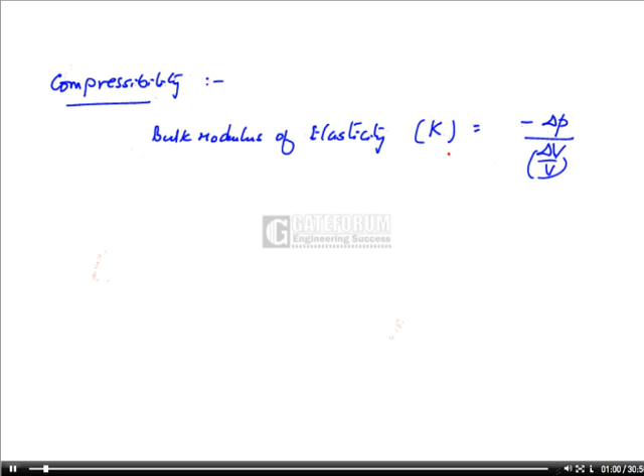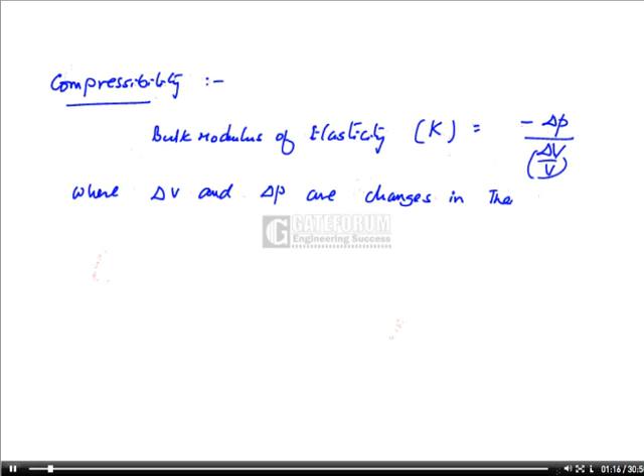How do we define bulk modulus? Bulk modulus of elasticity, K, we define as volumetric stress by volumetric strain, where delta V and delta P are changes in the volume and the pressure respectively, and V is the initial volume. Negative sign only means that as the volume decreases, the pressure will be increasing.

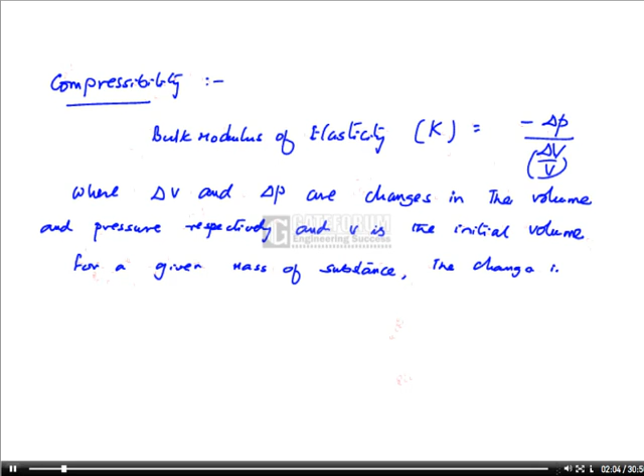For a given mass of substance, the change in volume and density rho satisfies the relation delta V by V, change in volume by initial volume, is minus delta rho by rho. Therefore, bulk modulus K can also be defined as rho into dP by d rho, where P is the pressure and rho is the density.

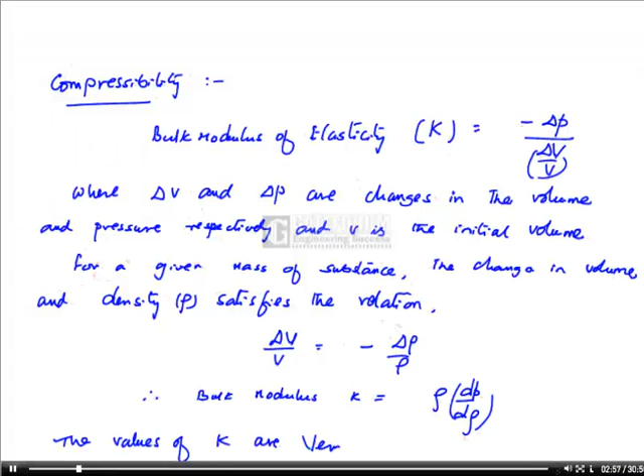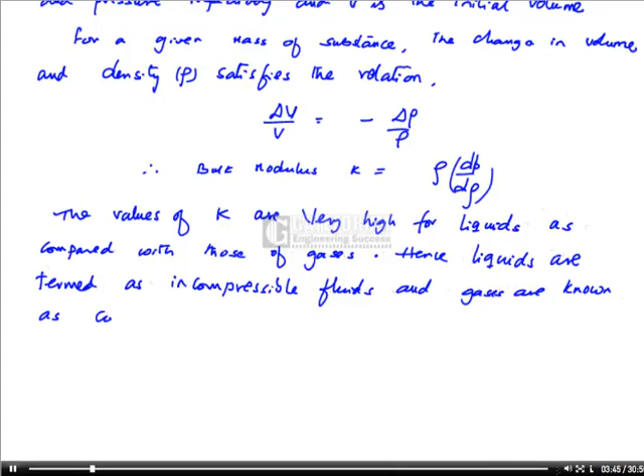The values of K are very high for liquids as compared with those of gases. Hence liquids are termed as incompressible fluids, and gases are known as compressible fluids. This is a very important distinction between the gases and liquids.

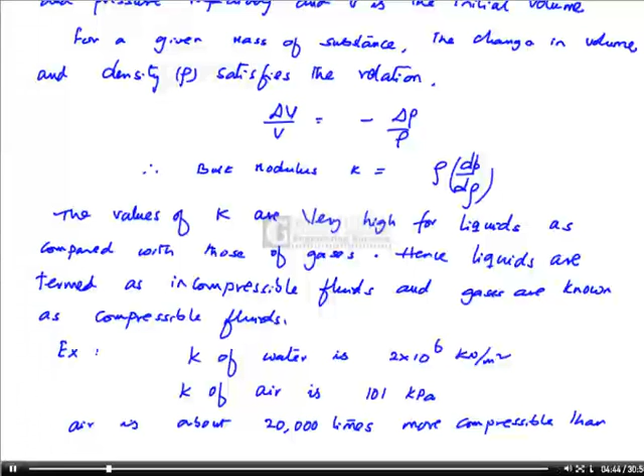For example, K of water is 2 into 10 power 6 kilonewton per meter square, whereas K of air is 101 kilopascal at atmospheric pressure. So look at the difference between the K values of water and air. So I can say air is about 20,000 times more compressible than water. Therefore, water can definitely be treated as incompressible fluid.

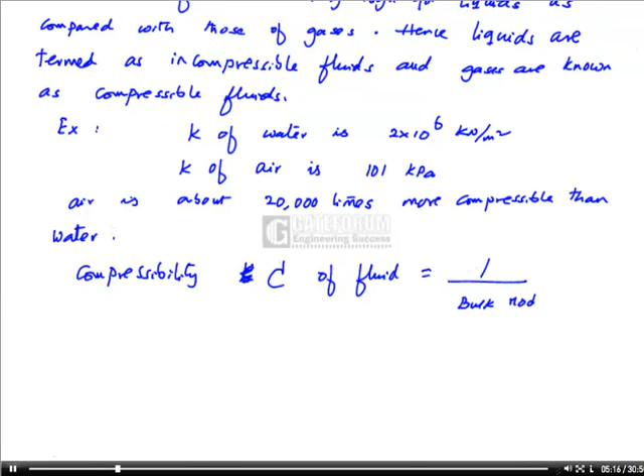Now, compressibility C. Compressibility C of fluid is 1 by bulk modulus of elasticity. Therefore, C is 1 by K. So I can define C as 1 by rho d rho by dP, or minus 1 by V delta V by delta P.

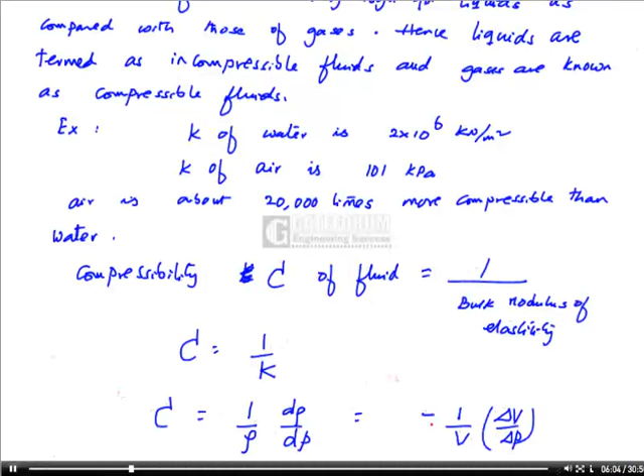For any gaseous substance, usually a change in pressure is associated with a change in volume and change in temperature. For gases, particularly for ideal gases, we can write the thermodynamic equation of state as P is rho R T. The change in pressure is associated with change in density as well as change in temperature, where R is the gas constant. We already know this is a thermodynamic relation. Thermodynamically, PV is equal to MRT. This is the same equation as PV is equal to MRT, or ideal gas equation or perfect gas equation.

So I want to highlight here that for liquids, density is practically a constant, whereas for gases, density is a function of pressure. Therefore, liquids are termed as incompressible fluids. So from now onwards, whenever densities are treated as constant, that means the fluid is treated as incompressible fluid. If density is a function of pressure, the fluid should be compressible. Usually it is gases. All the liquids are incompressible fluids.

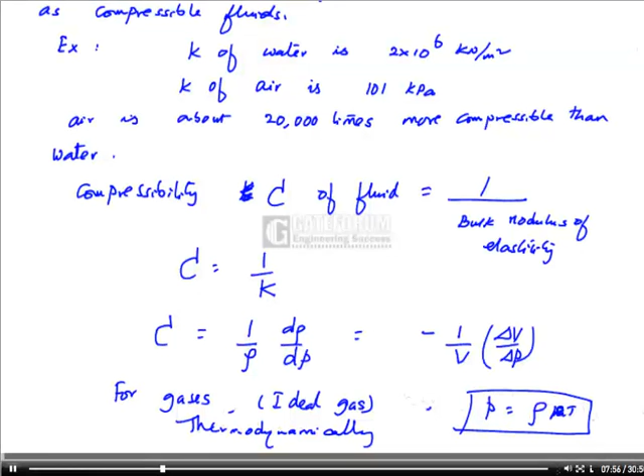But there is one important note here: under very small changes of density, that is if the density changes are less than 5%, even gas flows can be treated as incompressible flows, because such density changes less than 5% can always be neglected, and practically that gas flow can be treated as incompressible flow if the density changes are less than 5%.

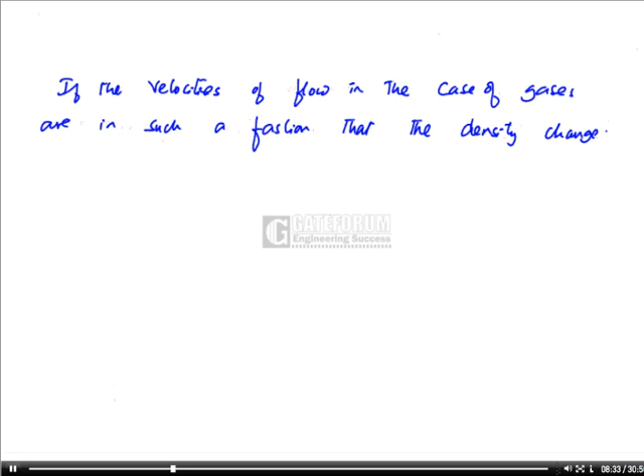So I can say that if the velocities of flow in the case of gases are such that the density changes of gases are less than 5%, then such flows can be treated as incompressible flows.

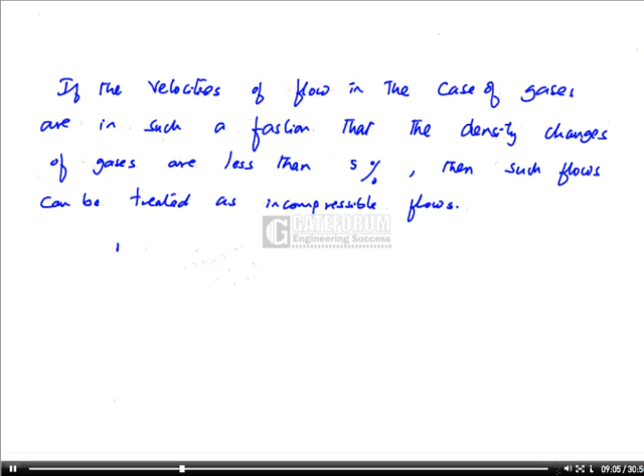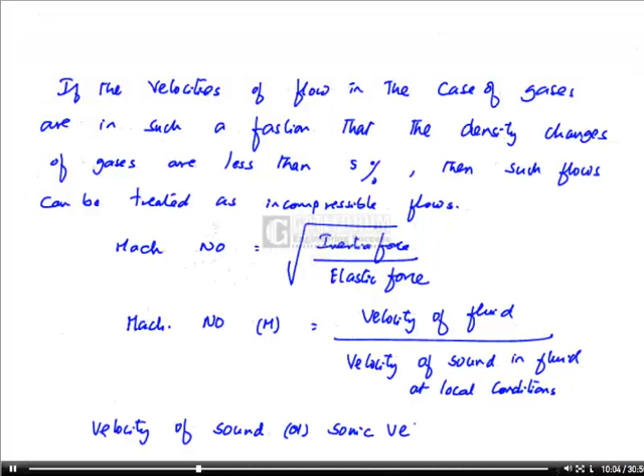So now here I use a very important number known as Mach number for distinguishing between compressibility and incompressibility of a fluid. Mach number is defined as square root of inertia force divided by elastic force. Mach number M is also defined as velocity of fluid divided by velocity of sound in fluid at local conditions. The velocity of sound or sonic velocity A is defined as square root of bulk modulus divided by density of the fluid.

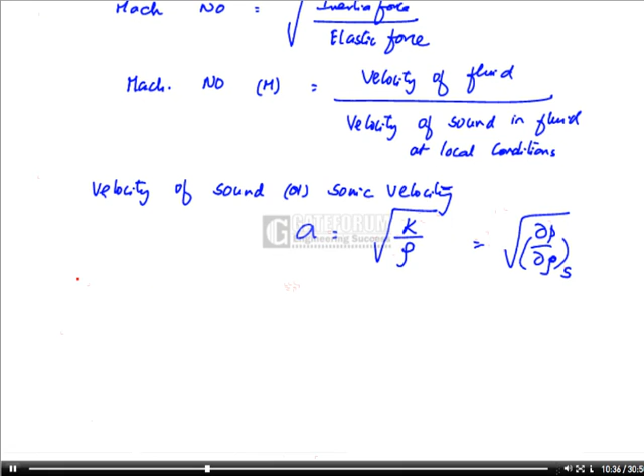It can also be written as square root of dou P by dou rho at isoentropy conditions. If Mach number is greater than 1, it implies flow is supersonic. If Mach number is less than 1, it means flow is subsonic flow. If M is equal to 1, it implies flow is sonic flow.

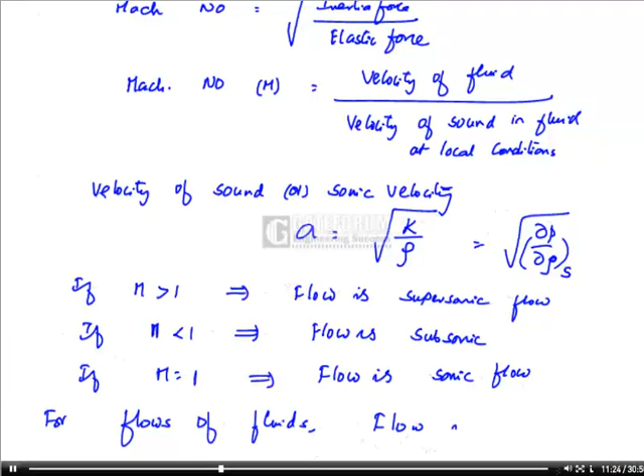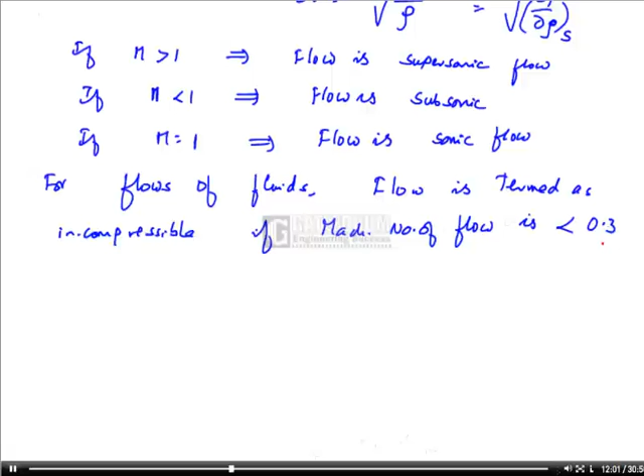So for flows of fluids, flow is termed as incompressible if Mach number of flow is less than 0.3. That is, roughly the velocity of flow is about 110 meters per second. For example, if the air flow is around 110 meters per second, the flows of air can be treated as incompressible flow. Example I can give.

The velocity of flow of air up to 110 meters per second under local standard conditions, then flow is treated as incompressible flow because density changes are not appreciable. The density changes are maximum 5% only. So this is very important, distinguishing between compressibility and incompressibility of a fluid.

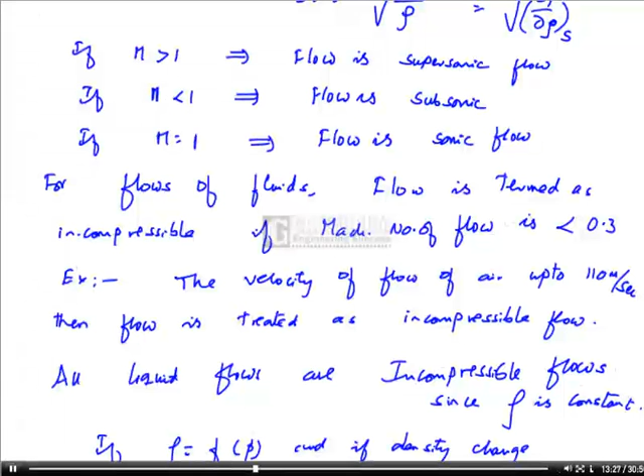All liquid flows are incompressible flows, since density is constant. If rho is a function of pressure and if the density changes are appreciable, and if density changes are more than 5%, it implies flow is compressible flow. Analysis of compressible flow is slightly advanced fluid mechanics.

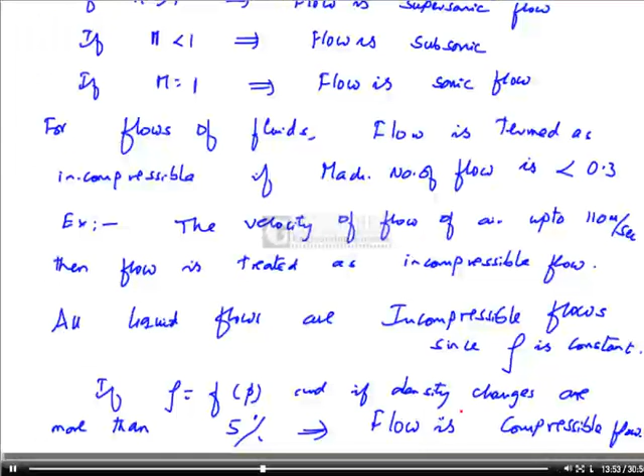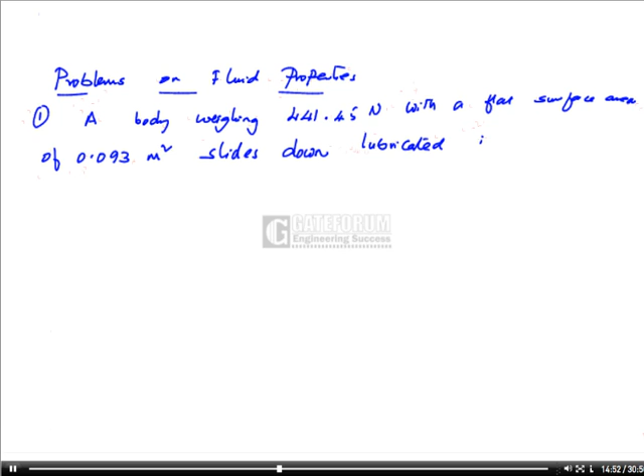Now I shall solve problems on fluid properties. First problem. The problem is given like this. A body weighing 441.45 newtons with a flat surface area of 0.093 meter square slides down a lubricated inclined plane making a 30-degree angle with the horizontal.

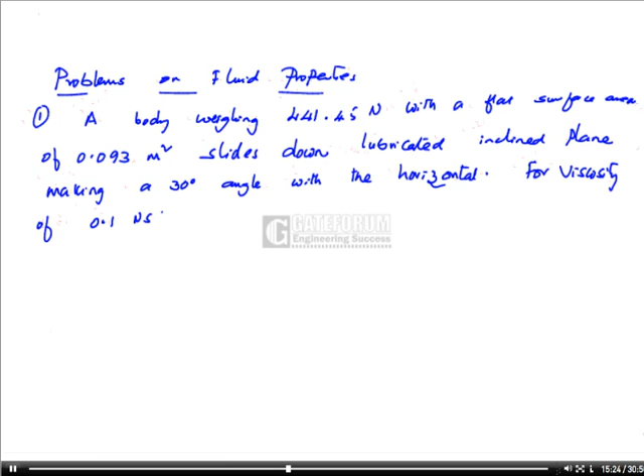For viscosity of 0.1 Newton second per meter square and body speed of 3 meters per second, determine lubrication film thickness. The solution to this problem is given like this.

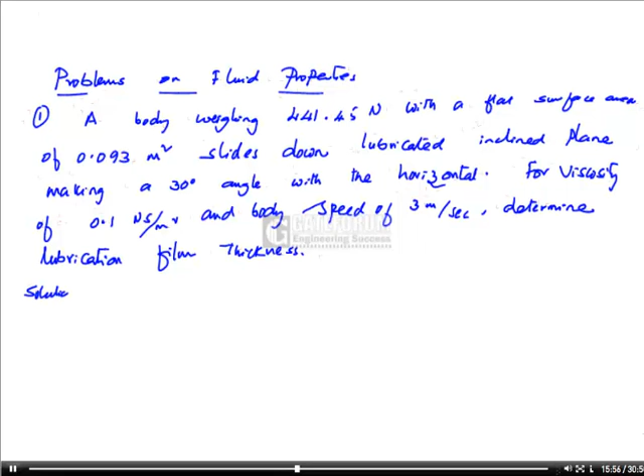It's an inclined plane over which the flat plate having a contact area of 0.093 meter square is sliding over a lubricant film of thickness Y. Thickness of the lubricant is Y. The plate is sliding down with a velocity of 3 meters per second. Since the gap between plate and inclined plane which is filled with the lubricant is very small, that is Y is very small,

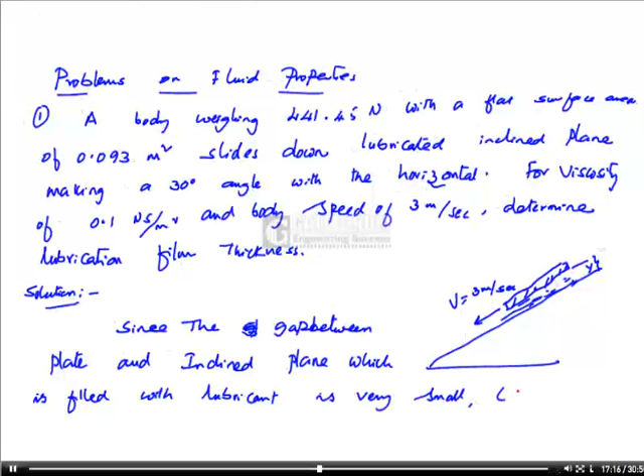dV by dy can be taken as V by Y, that is velocity variation with respect to Y is treated as linear. That is, if this is a plate, if this is inclined plane of 30 degrees, the velocity variation can be treated like this. If this is the plate, the velocity variation can be treated as linear.

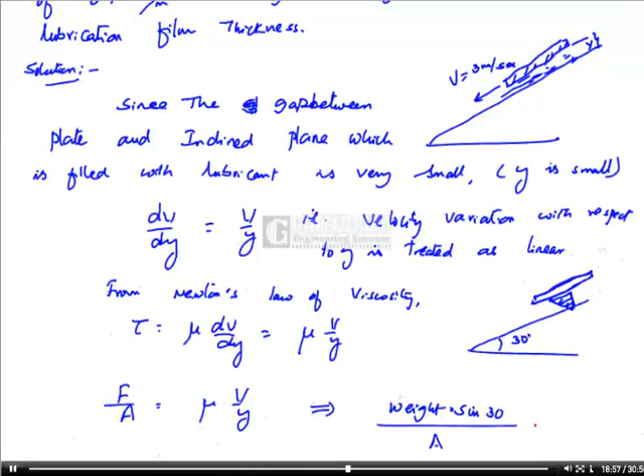Therefore, from Newton's law of viscosity, tau is equal to mu into dV by dy, that is mu into V by Y. What is tau? F by A is equal to mu into V by Y. What is the force that is acting on the plate going downwards? That is weight into sin 30 divided by area is equal to mu into V by Y. What is weight? 441.45 into sin 30. What is the area of contact?

The weight component that is acting is W sin 30, which is opposed with the viscous resistance. This is viscous resistance, viscous force. Viscous force is a non-conservative force. So the downward weight component is exactly balanced upwards with the viscous force or viscous resistance offered by lubricant film thickness. That is the reason why net force along the plane acting on the plate is 0. The body is sliding down with constant velocity. So the weight component is nothing but the viscous force upwards acting on the plate.

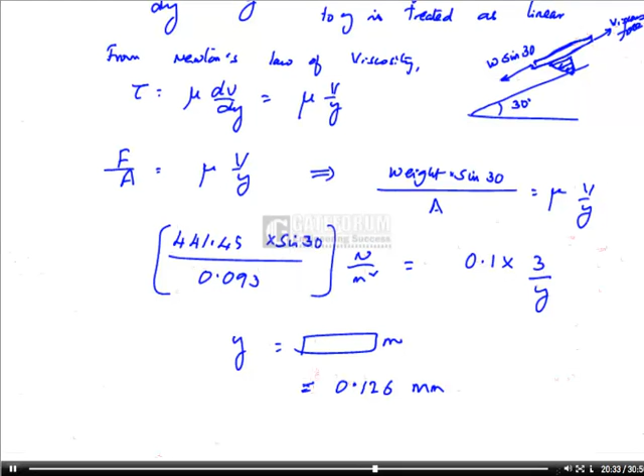F divided by area is 0.093 meter square. This is given by Newton by meter square is equal to mu, given as 0.1, into the velocity, sliding at 3 meters per second. Y is unknown. Therefore, Y is obtained in meters. The answer for Y should be obtained as 0.126 millimeters. So as we have assumed the gap is very small, the assumption is right. So for such small, narrow gaps, the velocity profile can be assumed as linear, and hence du by dy can be treated as v by y. The velocity gradient can be treated as v by y. Hence the problem.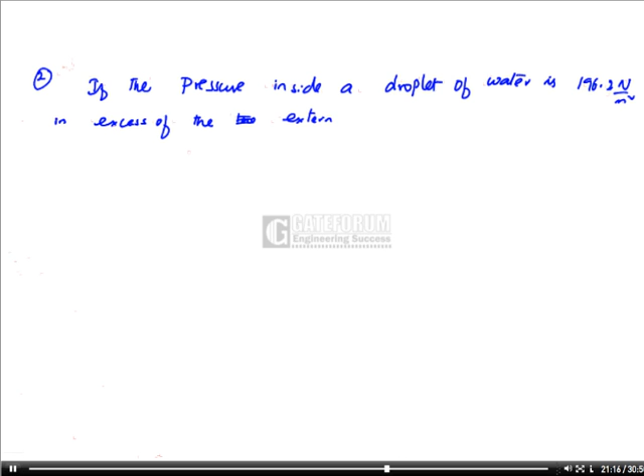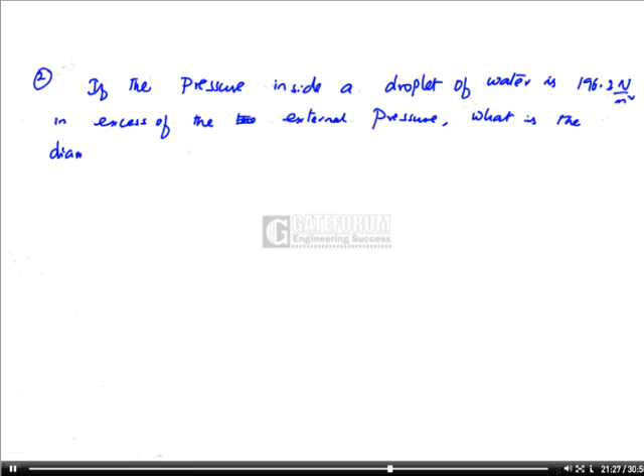Problem number 2. It is on the surface tension. If the pressure inside a droplet of water is 196.2 Newton per meter square in excess of the external pressure, what is the diameter of droplet?

Given that sigma of water in contact with air at 20 degrees centigrade is 0.07358 Newton per meter. The solution to this problem is given as: this is the water droplet having the radius r.

The pressure P gauge inside the water droplet, that is, pressure in excess of the droplet above atmosphere; outside is atmosphere. The P gauge, the pressure inside the droplet in excess of the outside atmospheric pressure, is given by 2 sigma by r, 2 into 0.07358 divided by radius.

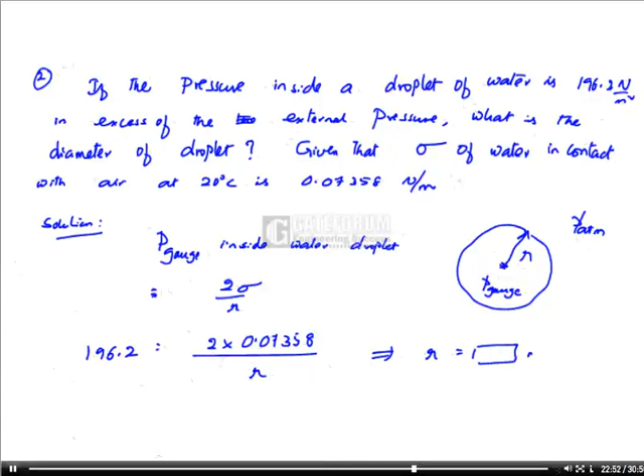P gauge is given as 196.2 Newton per meter square, which implies R is obtained in meters. Diameter is 2 into R. The answer should be 1.5 millimeter. That is the diameter of the water droplet.

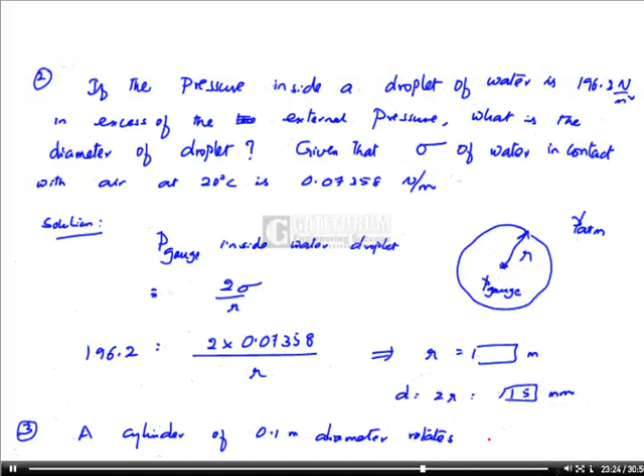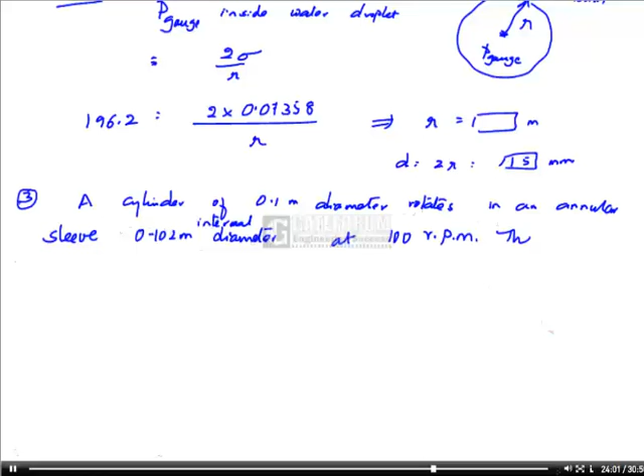Next problem, what I consider is a cylinder of 0.1 meter diameter that rotates in an annular sleeve of 0.102 meter internal diameter at 100 rpm. The cylinder is 0.2 meters long.

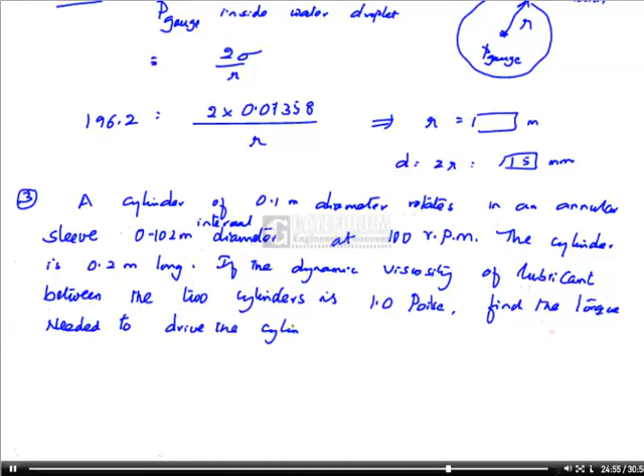If the dynamic viscosity of lubricant between the two cylinders is 1 poise, find the torque needed to drive the cylinder against viscous resistance. Assume that Newton's law of viscosity is valid and velocity profile is linear.

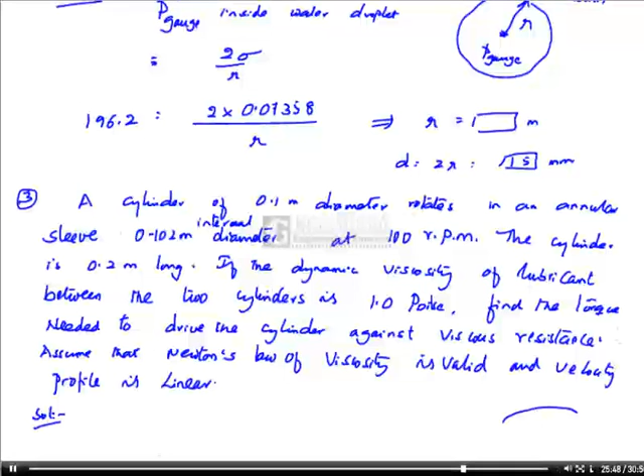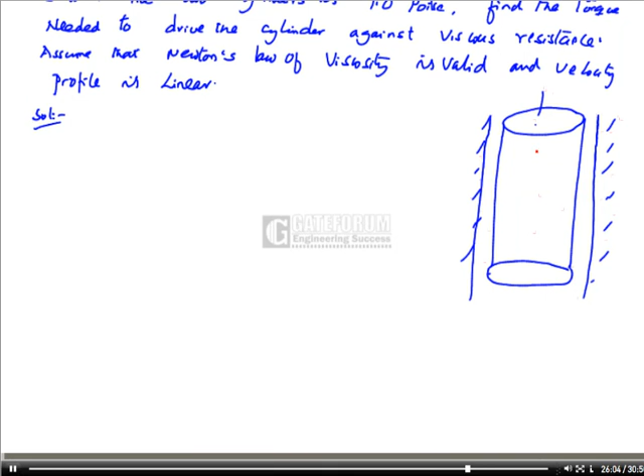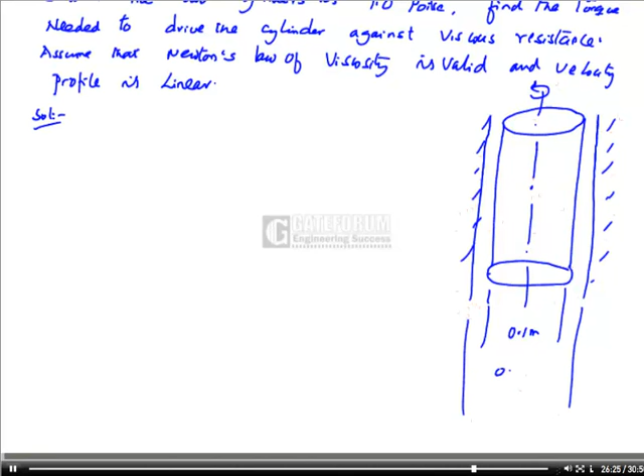The solution to this problem could be given like this. First of all, let me draw a figure depicting the problem. This is the shaft rotating in a sleeve. This is the sleeve. This is the axis of the cylinder. It is rotating with a certain RPM, that is 100 RPM. The diameter of the cylinder is 0.1 meters, whereas the internal diameter of the sleeve is 0.102 meter. So the gap between these is all lubricant, having the viscosity of 1 poise.

The sleeve is fixed, the cylinder is rotating with an RPM of 100. Naturally, as the cylinder is rotating inside the sleeve, what is the tangential velocity of the cylinder? Same is the velocity of the fluid layer that is attached to the cylinder. A certain layer of the fluid attaches itself to the cylinder. It cannot slip from the cylinder. Therefore, whatever the tangential velocity of the cylinder at its periphery, same is the velocity of the fluid layer.

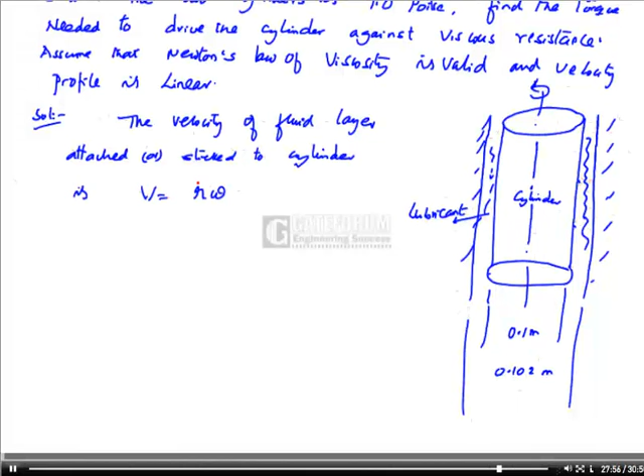Therefore, first of all, I calculate the velocity of the fluid layer attached or adhered to the cylinder: V is equal to R into omega, where omega is the angular velocity of the cylinder. The torque exerted is equal to force into radius.

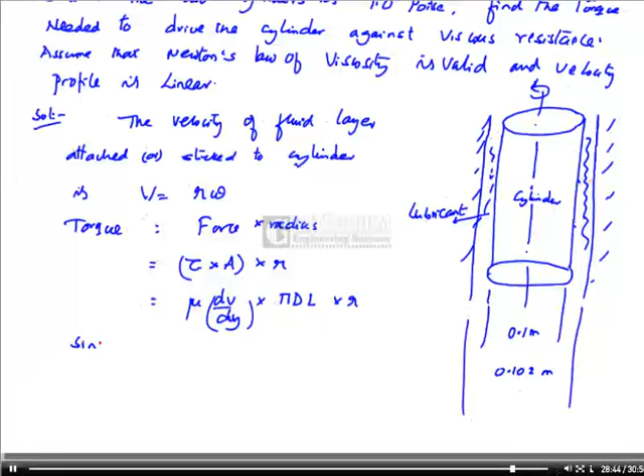What is force? Viscous stress into area into radius. What is stress? Mu into dV by dy from Newton's law of viscosity. What is the area of contact? Pi d into L into radius. Since velocity profile is linear, dV by dy is V by y. Therefore, torque is equal to mu into V by y into pi into diameter, which is 2 into radius of the cylinder, into L, where L is the length given as 0.2 meters, into R, from which substituting all the values, the torque value could be obtained.

Please remember mu is given as 1 poise. So what is the mu? 1 by 10 Pascal second. So please substitute mu as 1 by 10. Velocity is obtained as R into omega, where omega is 2 pi n by 60. The gap y: this is the gap y, please indicate y here. What is y? 0.102 minus 0.1 divided by 2. That is the value of y. I have indicated it in the figure.

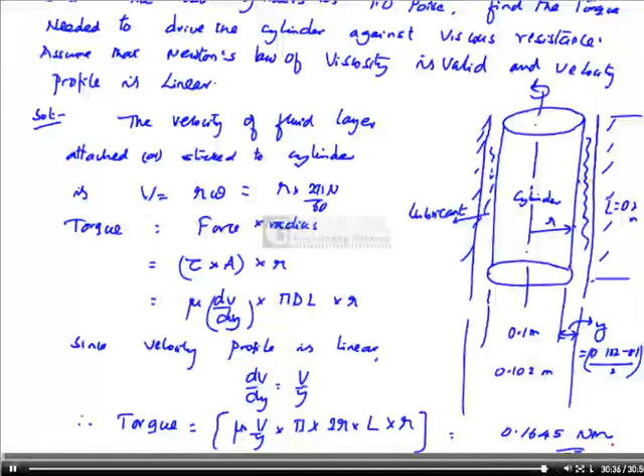This is y. Y is known, velocity is known, radius of the cylinder is known, length of the cylinder is 0.2 meters. Substitute all the values. We would obtain the torque as 0.1645 Newton meter. Please substitute mu as 1 by 10 Pascal second, because mu is given as 1 poise. 1 poise means 1 by 10 Pascal second. Velocity is r omega. So all the values are known, and torque could be calculated. Hence the problem.